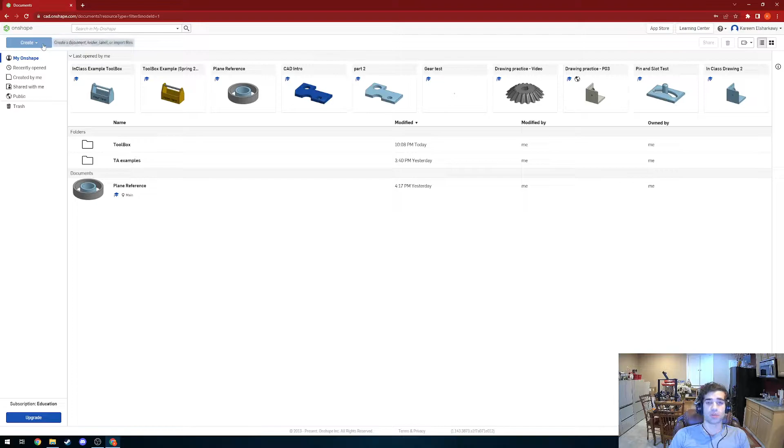The first thing we're going to want to do is press create, because we're going to be creating a new document. One of the things that's interesting about this is we are creating an assembly, which means there's going to be multiple parts all put together in order to make our toolbox.

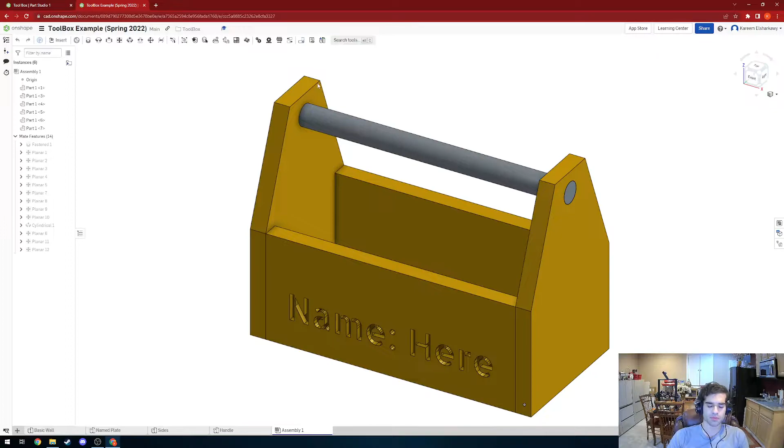One thing I do want to show you guys really quickly is just the thing we're trying to create, to help you visualize what we're doing here. We're trying to create this toolbox with an engraved name on it. It really shouldn't be too bad.

First thing we're going to start off with is the basic wall. This really shouldn't be too bad, there's only like 2 operations that we need to accomplish. So the first thing I'm going to do is create a new sketch and select the top plane. I'm then going to click on the top of the cube so that it orientates the camera towards the top plane.

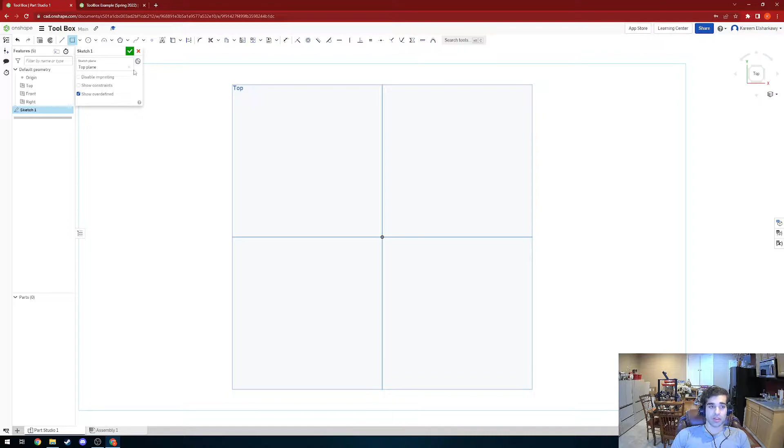Now I'm going to create a corner rectangle using the rectangle tool. Click it at the origin so that it's centered, click one more time. Now I'm going to click the dimension tool and set this distance to 12 inches. Zoom out, pan over, click on this line here.

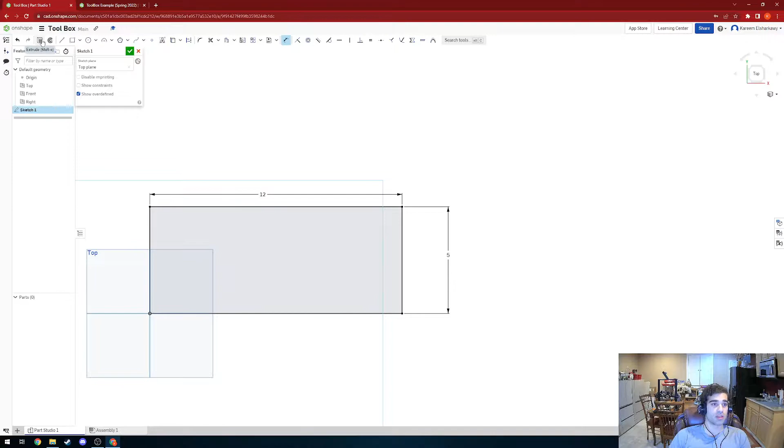That's going to allow me to adjust the length. I'm going to set this to 5. Then you only have one more thing to do, just press the extrude button. Now you can see if you move your camera to the side, it'll give you a little preview of what's going on. I'm going to make this 3/4 of an inch.

Then all I have to do is just press the check mark, and then we have our solid part. I'm going to go ahead and rename this. You can very easily do that by right-clicking Part Studio 1 and clicking Rename. So then I'm going to go ahead and name this Basic Wall.

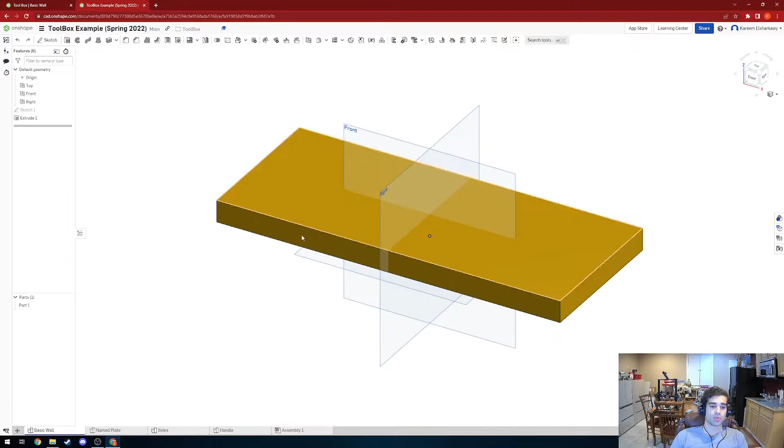Now the next thing you got to do is create that nameplate that we did. So the way I'm going to go about doing this is, instead of creating a whole new part, I'm actually just going to duplicate it over to save ourselves time. In order to do that, it's super simple, just right click and press duplicate.

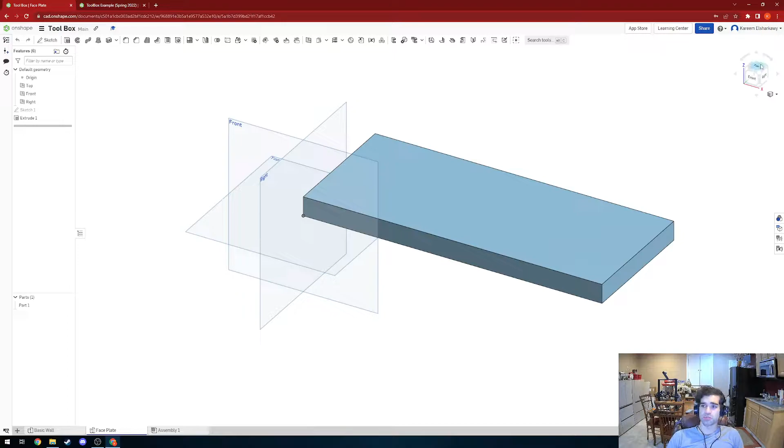As you can see here, we have our copy. So I'm going to rename it faceplate again. This is completely visual and isn't completely necessary, but I find it makes things much more organized, especially as you start to assemble things. So I'm going to go ahead over to the top plane just like before.

I'm going to create a new sketch. I'm going to click on the top of our part, because you can also define sketches by faces of objects, since you can essentially define the face as a plane per se.

So then I'm now going to use the text tool up here. Click again, and now it's going to ask you what you want to type. I'm going to put 'insert name'.

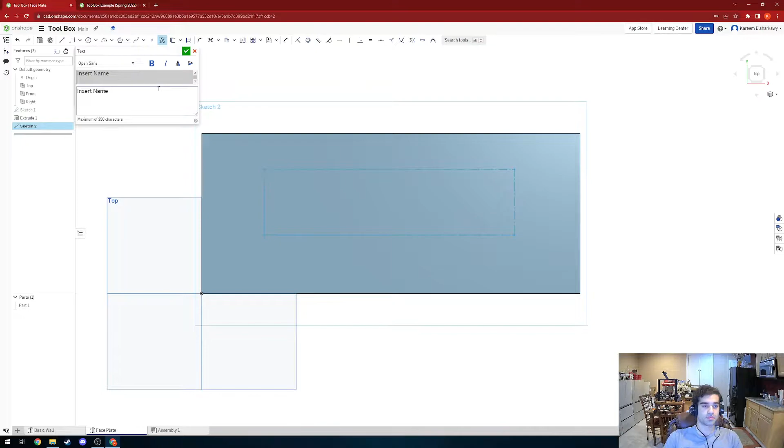And of course you put your own name here, but now you can see this clearly doesn't fit inside of our box, which isn't too bad. Again, if you want to move it, you just click and drag it around. Isn't too bad.

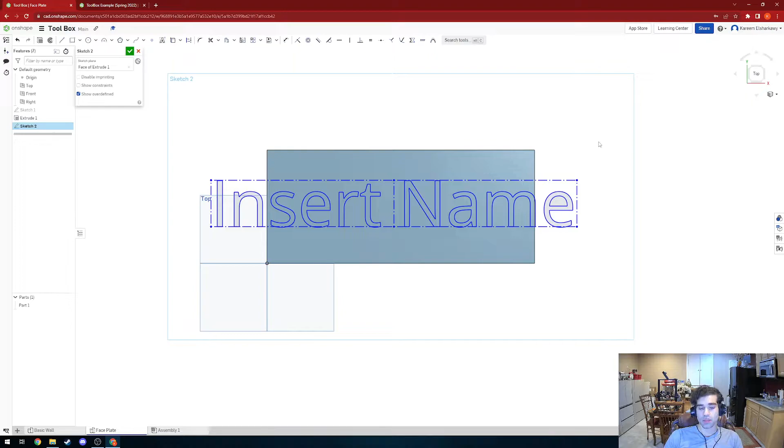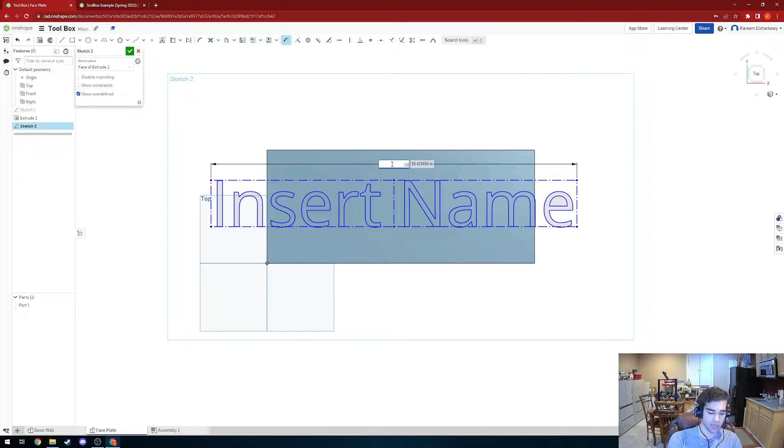So then now what I want to do is center this on the center of our box. First thing I'm going to do is, using the dimension tool, click on the top of this little text box, I guess is the best way to describe it. And I'm going to make this 10 inches because I know the box is 12. So now that'll scale it down to a much more reasonable level.

Now I want to center this around the center of our box. The way you're going to do that is, first of all, by clicking the point tool. I'm essentially giving the program a reference, giving ourselves a reference at which I can make all the relations. You'll see exactly what I'm saying in a moment.

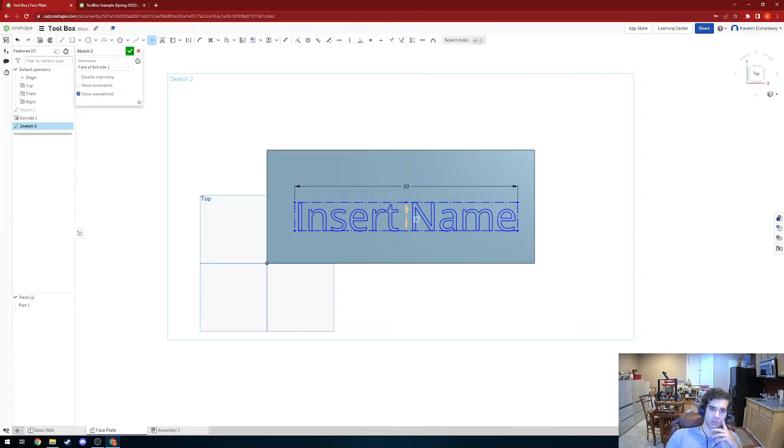So you're going to click the point tool, hover over the center line here, and you'll see this little square that pops up on your screen. Sorry if it's a little hard to see.

And you're just going to click on that square, and now it essentially put a point on the midpoint of our text box here, which is going to make this very easy to go about centering this. So all you have to do is click on that dot, hover over this line here, and you'll see this dot appear. That's the midpoint of the top line. Click on that, and you'll see I have both of them highlighted now.

All you have to do then is go to the relations. If you're on a laptop, a lot of times it'll be a little drop-down menu, but you'll see it on the top right. I'm going to click on vertical. Now these 2 points have to be vertical to one another.

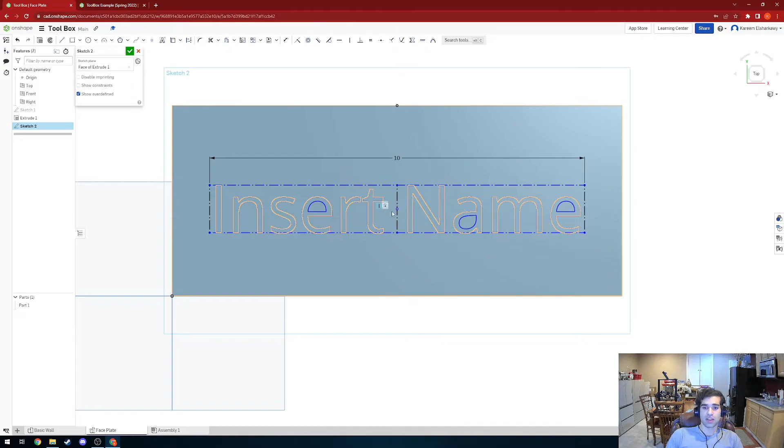And then a very similar process: I'm going to click on this midpoint, go over to the right here, click on this dot, with them both highlighted. Now I'm going to press horizontal. Now these 2 dots have to be horizontal. And you can see immediately this whole system turned black. That's showing it's fully defined, and therefore it cannot move. See, I can click and drag all I want, it's not going to go anywhere.

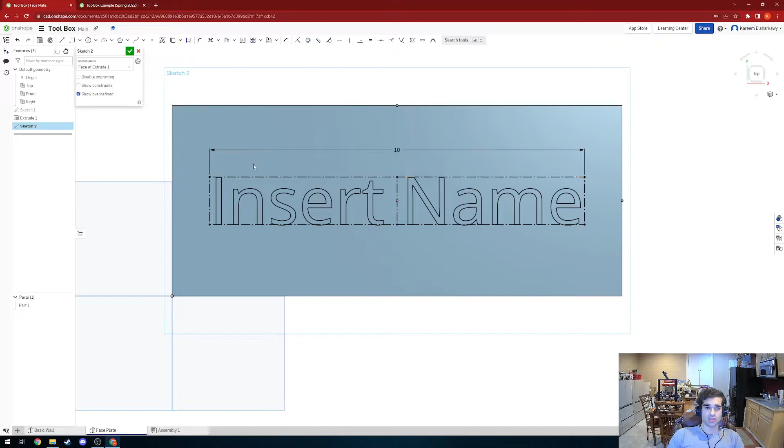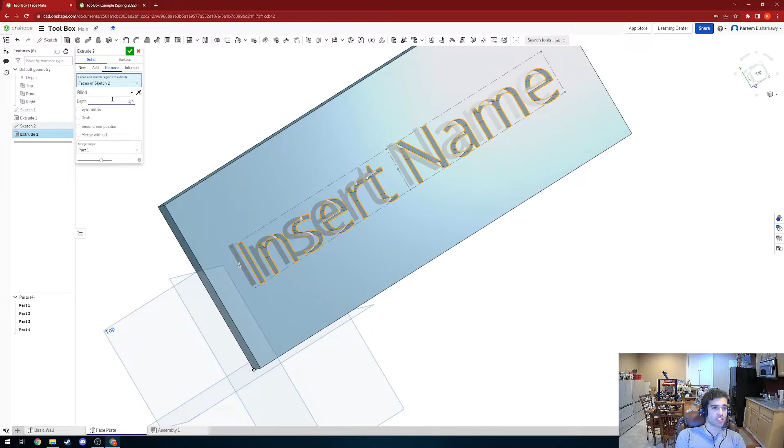So next thing I'm going to do is press extrude. It automatically selected the text for me, but this is going out, I want it to go in, I want it to be like an engraving. So I'm going to click on remove up here. So now you see it's cutting in, and then I'm going to tell it how far I want it to cut in. I'm going to say 1/4 of an inch. And now you can see we have our engraving. Not too bad. Hopefully everybody's following along here.

Now the next thing I'm going to do is create another part, because we only have 2 more to go. The next one I'm creating is the side. All we have to do now is go back to our part, click on the little plus sign on the bottom left, and we're going to be creating a part studio.

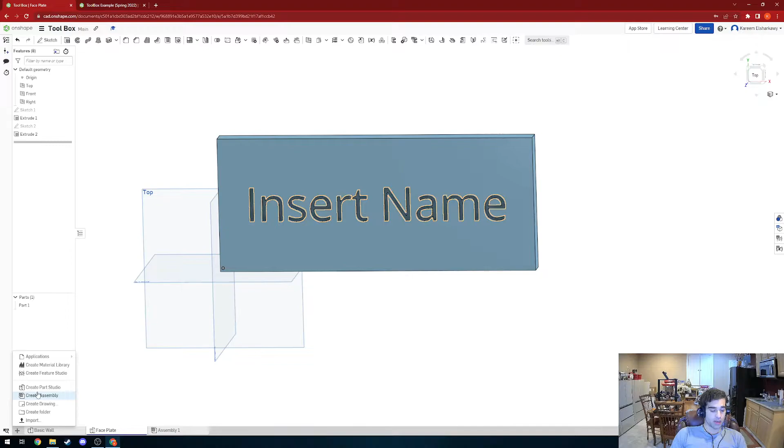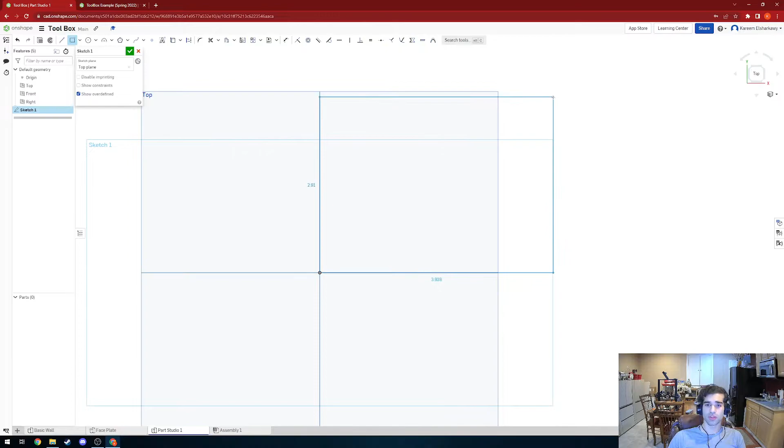Now I'm going to do a very similar process to what we did with everything else. We're going to click on the top plane, so now we're aligned with the top. Click sketch, click on the top plane, and now we're sketching. So now the next thing I want you guys to do is click on the rectangle tool, click on the origin, bring it over, click one more time. This is going to be the bottom section of our side.

Then I'm going to do another thing here, but with the line tool. However, I'm going to click on construction. This construction feature will make it so that it won't be incorporated into our perimeter, and it's just used for relations. You'll see exactly what I'm saying.

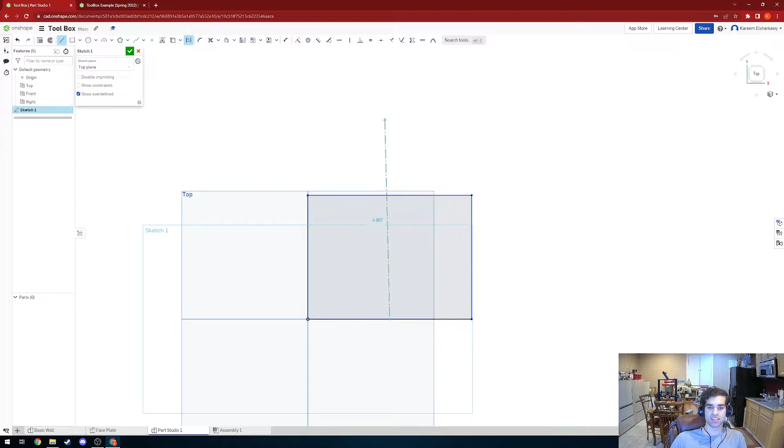So now we're going to go over to this bottom line here, and if I move my cursor over, you'll see that box appear again. So I'm centering this line on the midpoint of this line here. So now the start of this line is centered around the midpoint. Now the next thing, you'll see as I move it'll kind of want to snap into the vertical position here. So when it is, just click again. Now this line is defined to be both at the midpoint of this line, yet vertical at all times, which is exactly what we want, because it's going to be our midline.

Now the next thing I'm going to do is click the line tool, and I am going to create a line coming off of this dot here. You'll see sometimes you have to play with it a little bit, but you'll see it'll make a little line coming off the dot with a horizontal relation marker underneath it. That's going to tell us that if I click now, it'll make a horizontal relation between this line and the dot. So now if I click again, no matter where I move this line, it's always going to be horizontal, which is exactly what we want.

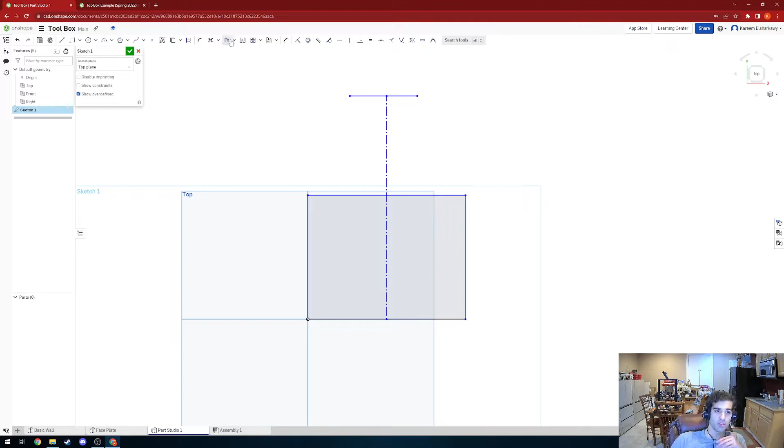Next thing I'm going to do is click the line tool one more time. Click, connect the dots, click, connect the dots. And you'll see the perimeter will be filled in with this beautiful gray color.

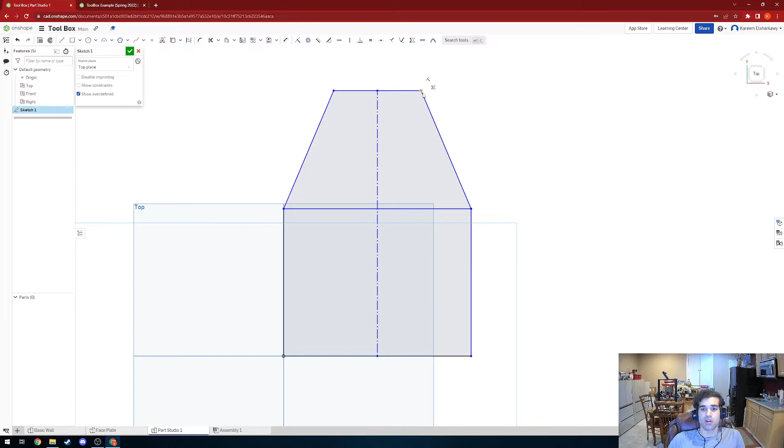Next thing we're going to do is I want to make this symmetrical. All you have to do for that is click on this line here, the right slant, the left slant, and your midline. See, with all 3 of these highlighted now, I'm going to click on symmetric. Again, this might be in your drop-down menu on the relations tree. I'm going to click symmetric. Now, no matter how I move these 2, they'll always be symmetric to one another.

Next thing I'm going to do is add our circle, which is going to be the hole that the handle will go in.

Now I'm going to go ahead and start defining things with my dimension tool. I'm going to click on this bottom line and make this 6.5, because we know the thickness of our walls is 3/4 of an inch, and 2 times 3/4 is 1.5.

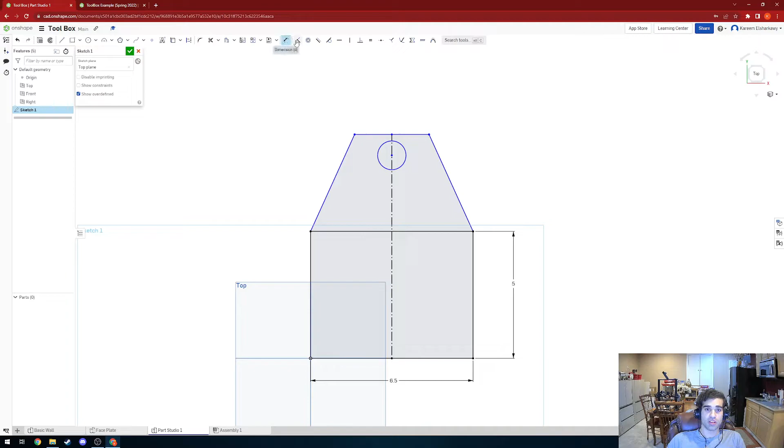So I'm going to set the 6.5, and I'm going to set this to 5 inches. I will set this distance, and again, with the dimension tool, all you have to do is click on the dimension tool, click on one of your lines, then click on the other one, and you'll get the distance between the two.

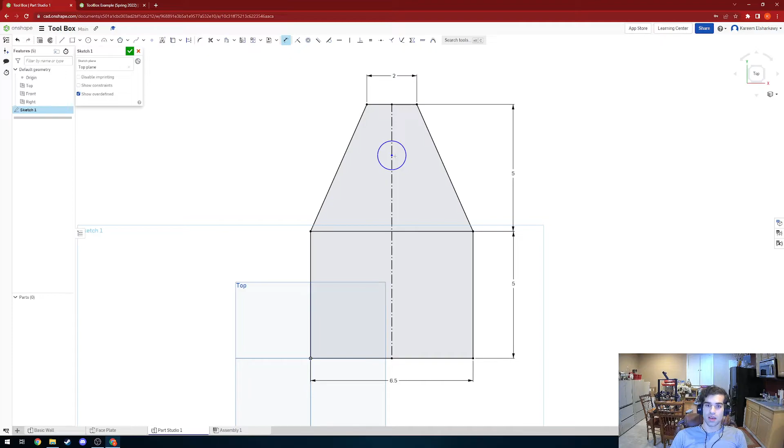Now I'm going to set this to also be 5 inches. And lastly, or almost lastly, it's going to be 2 inches. The distance from the center of our circle to the top is going to be 1.5 inches, or we can make it 1 inch. And then the size of the circle itself can be 1 inch also.

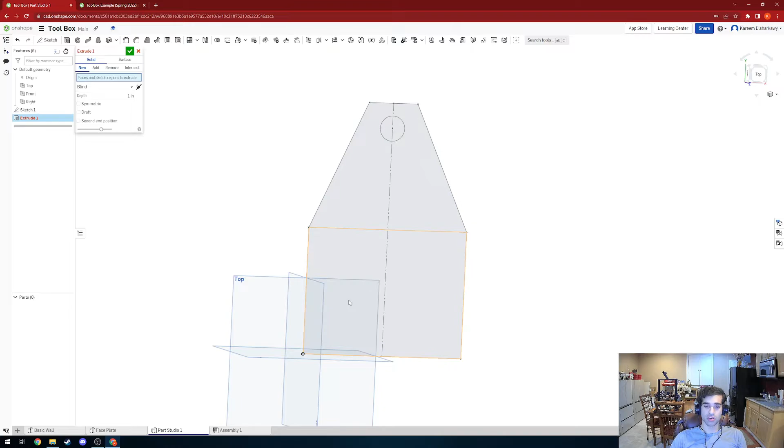Now I'm going to go ahead and press extrude. You'll see our perimeter should be highlighted. If it's not, you can just click on it and select it manually. Then I'm going to make this 3/4 of an inch, press enter again, and we have our part.

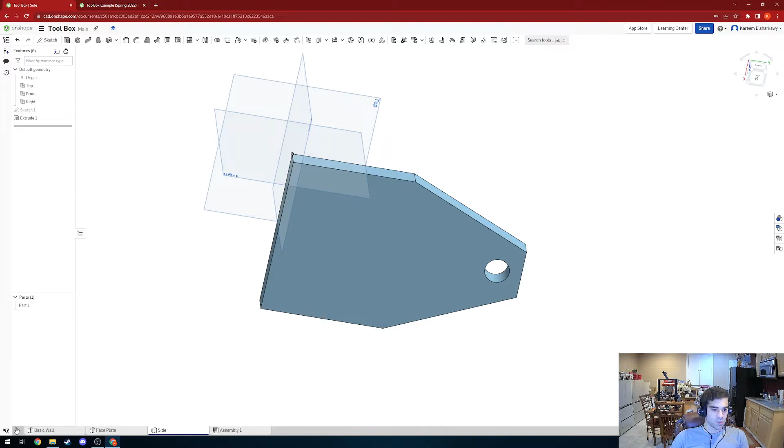So now the next thing I'm going to do is rename this real quick. Lastly our handle. Oops, I created an assembly by accident—don't do that. So now you're going to want to create a part studio.

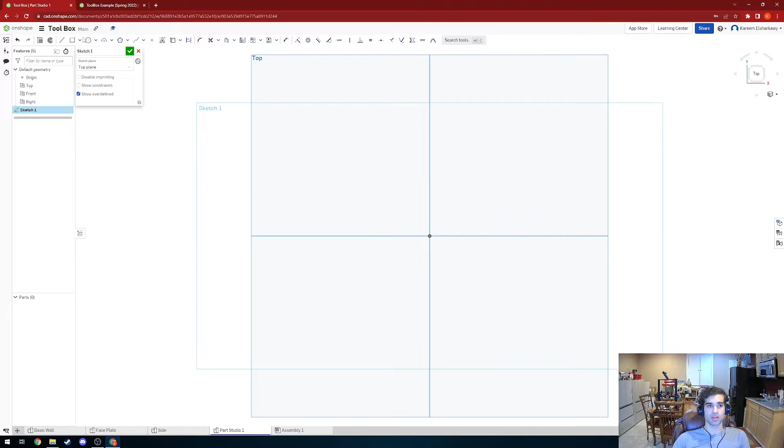We're going to want to go to the top plane as usual. Click sketch, click on the top plane, then select the circle tool. We're going to center it around the origin here, and using the dimension tool, I'm going to say for this to be 1 inch.

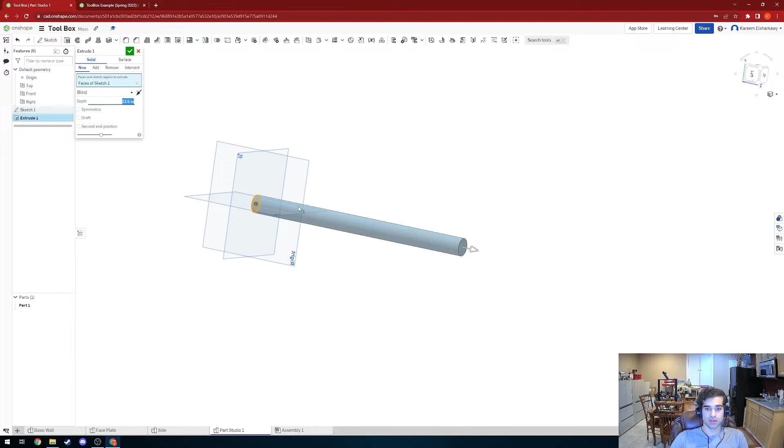Next, I'm going to press extrude. Move my camera to the side, and I'm going to make this 13.5 inches long, and press the check mark.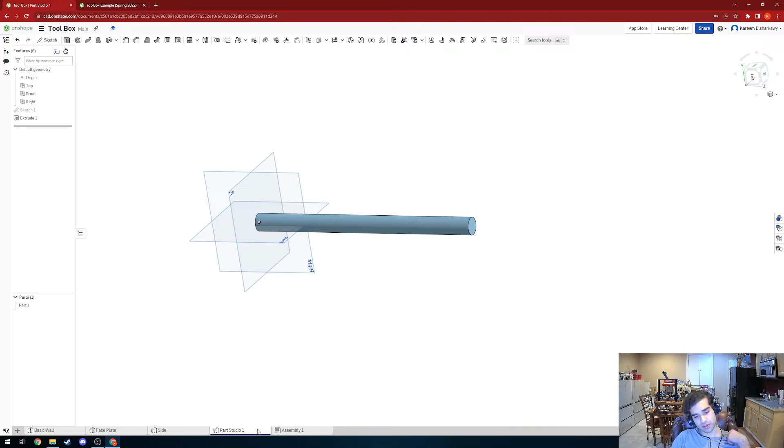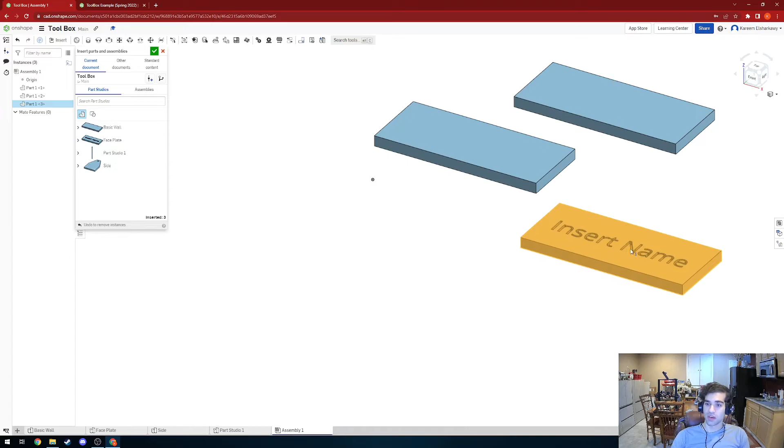I'm going to press insert and take our parts and put them into the assembly space. I'm going to zoom out a little bit, just click again, click once, click again. I need 2 of these, one of the nameplates, 1 handle, and 2 sides. Now that we have all our components, we just need to press the check mark, and it's time to bake this cake.

So now I'm going to first fix our base plate. All you have to do is press right click and fix. As you can see, this can't move now. When we're making these relations, we always want to make sure what we're fixing it to can't move itself. It's going to make your life a lot easier in the future.

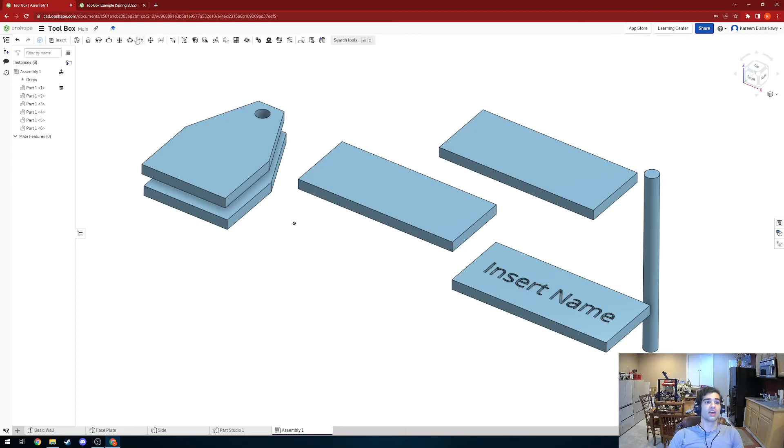You'll see exactly why. All these relations in the assembly are called mates. It's how you define how things are able to move in relation to each other.

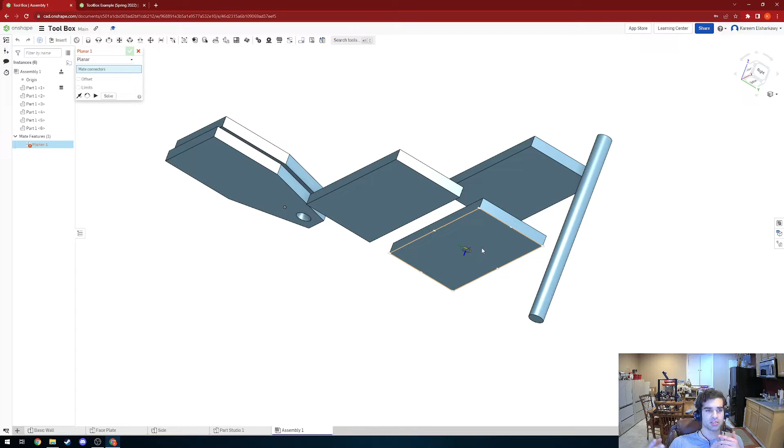So the first thing I'm going to do is click on the planar mate here on the top. It's going to ask me for 2 sides or 2 faces of multiple parts, so 2 different parts. You cannot click 2 faces on the same part because it can't fold in on itself, if you guys get what I'm saying. So I'm going to click on this bottom face of our faceplate, and the side of our bottom plate, and you'll see the 2 faces have now come together.

They're now on the same plane. That's what it means by planar.

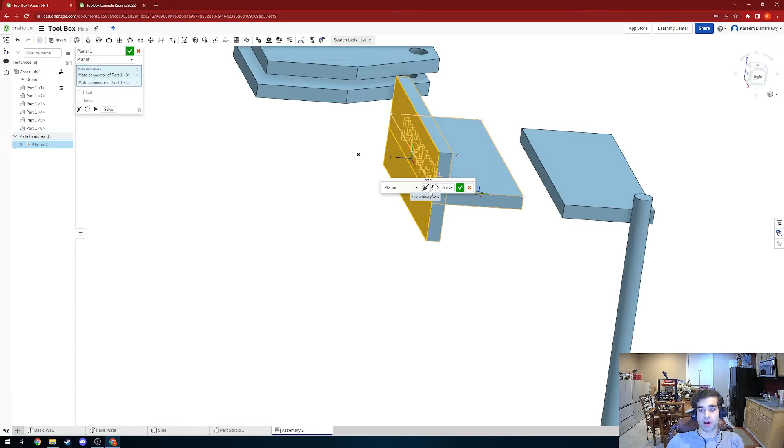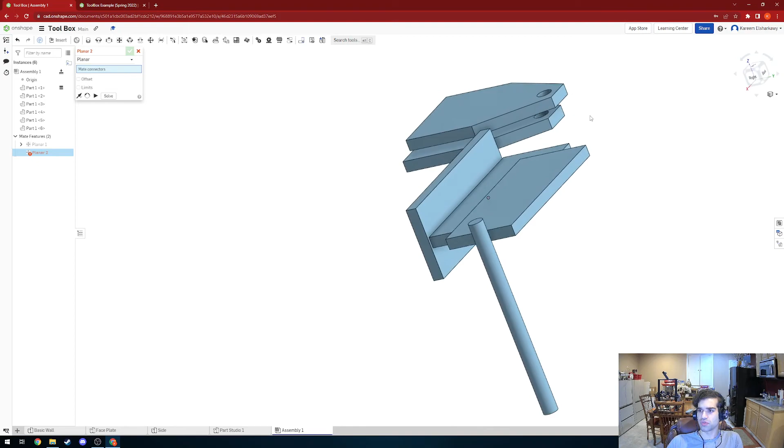So I'm going to go ahead and flip the primary axis because right now it is clipping into itself, as you can see. Don't worry, it'll be okay. Just click flip and the check mark. So now it's facing the right direction. But one thing to note is even though it's fixed on the Y plane in our case, as you can see here in the top right, it shows all 3 of your axes. It can still move in the X and the Z.

So now what I'm going to do is click the planar mate again, click on this face and this face, press solve because the preview is inaccurate, but when we press solve, it'll take your other mates into account. And now it can only move in the Z direction, as you can see.

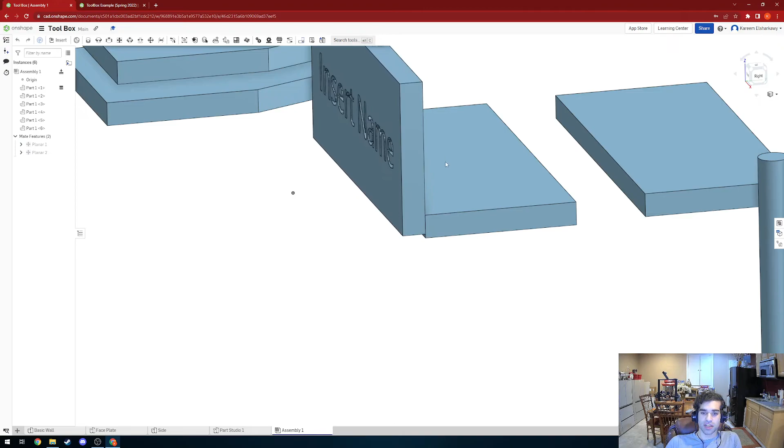So now I'm going to go back underneath here with the planar mate, click on these two sides. Now they're flush with each other. Press solve just to make sure that everything's okay. And the check mark.

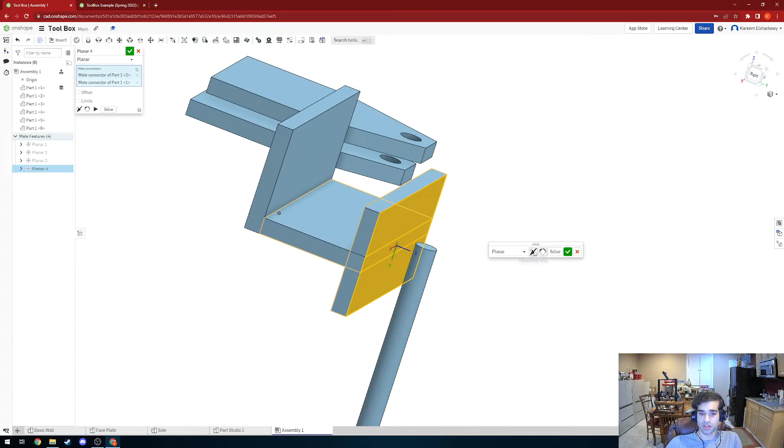Now I'm going to repeat the same process over here. So again, I'm going to click this face and this face. They're going to snap onto each other however they're clipping in. So I'm going to press flip, check mark, bottom here, check mark, and see where it can still move. It's always a good habit after you do a mate to wiggle it around, see what can go where. So now I'm going to click on these two sides here, press solve, check mark, and we got our plate.

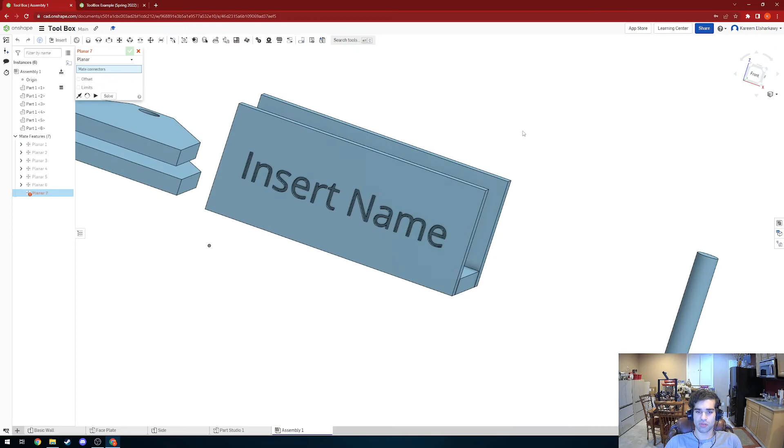We're almost done here. We're making good progress. So now I'm going to click on this face here, go over. I want to make these two sides connect. As you can see, it's clipping into each other. All we have to do, don't fret, just press flip, check mark. And even though this is facing the wrong direction, we'll make it face the right direction.

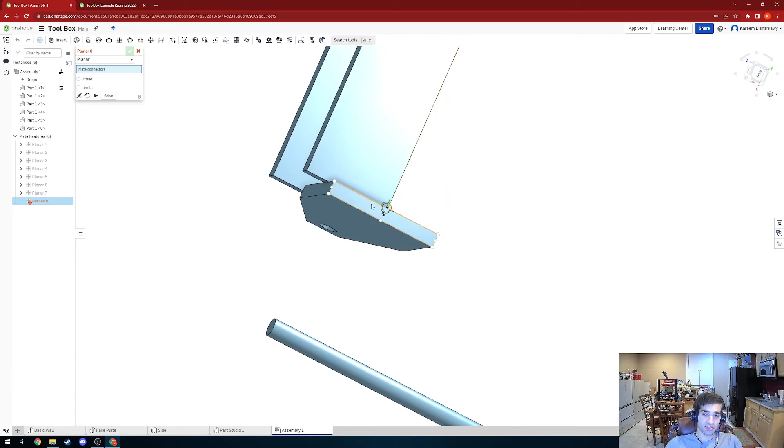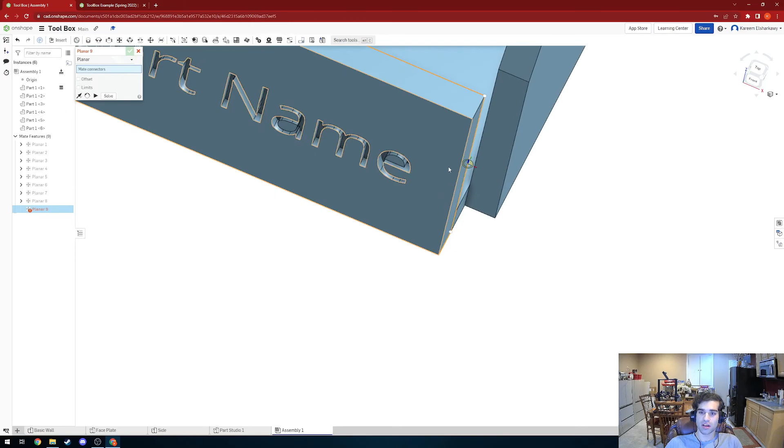Now we're going to click on this bottom face, and now I want it to be planar with this face here, so now it's going to rotate over to be in the right way. However, again, looks wrong, don't panic. Just press solve, press check mark, it's almost done. See which direction it can move, and it can move in the Y. All we have to do is just click on two faces to make them flush with one another. Here we go. Press solve, check mark, and we're good to go.

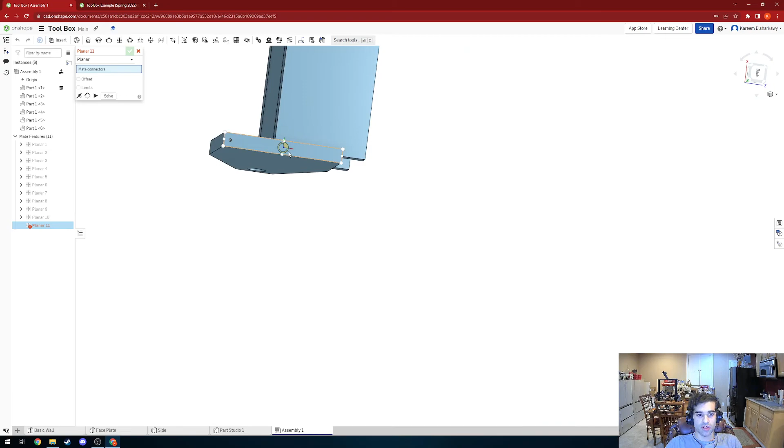Now I'm just going to repeat the process on the other side. Click on the broad face and one of the sides here because we want the two sides to be touching. I'm going to flip it, press the check mark. I'm going to go over here on the underside, click on the bottom of the side, click on the bottom of our toolbox, solve, check mark, see where it can go. You can go in the Y. Then I'm going to go ahead and make these two sides flush with one another. Check mark. And we are almost done.

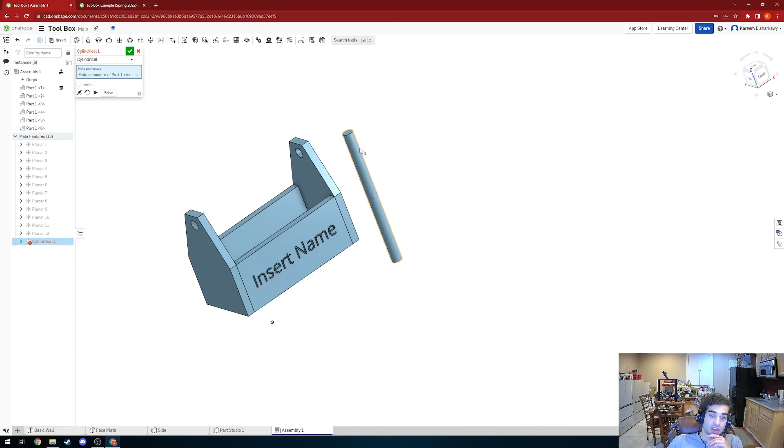Next thing I'm going to do is use a new mate. All this time we've been using the planar mate. This time we are going to be using the cylindrical mate. I'm going to click on the cylindrical mate, it's over here. I'm going to click on the face, the curved face of our handle. As you can see, it's highlighted in orange. So now I'm going to go over here, click on the curved face of the hole. That's essentially saying that the two faces are now going to share the same center point. So if I click here, now you're seeing they're sharing the same center point. Because they are the same size, that means that the two are touching.

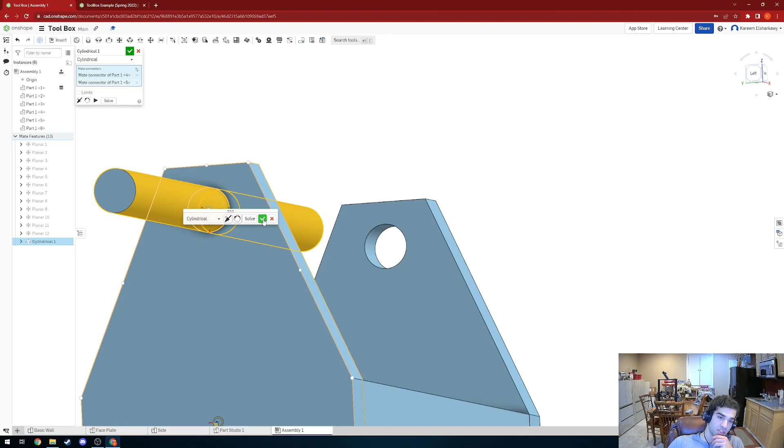Now the next thing I'm going to do is X out of the cylindrical, see where it can still go. It can only go in and out, so I'm going to click on planar, the face of our dowel, and the face of the side of our toolbox. Press solve the last time, check mark, and as you can see, our toolbox is done.

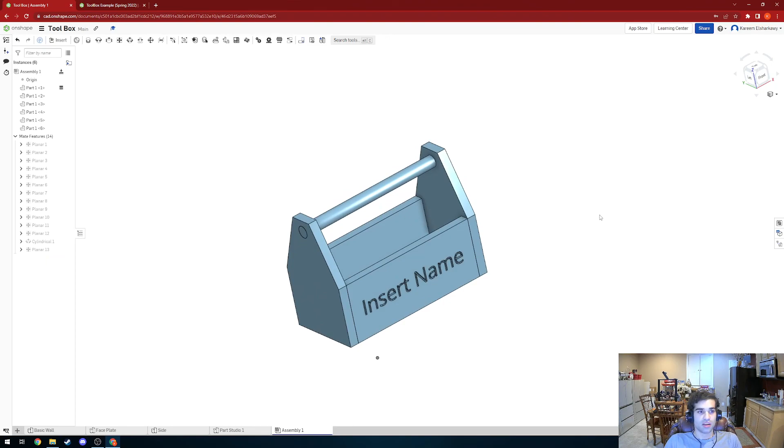All you have to do now is just align it nice and pretty so that you can take a picture of it using print, align it in your box, get it ready for the picture, and you just press download image.